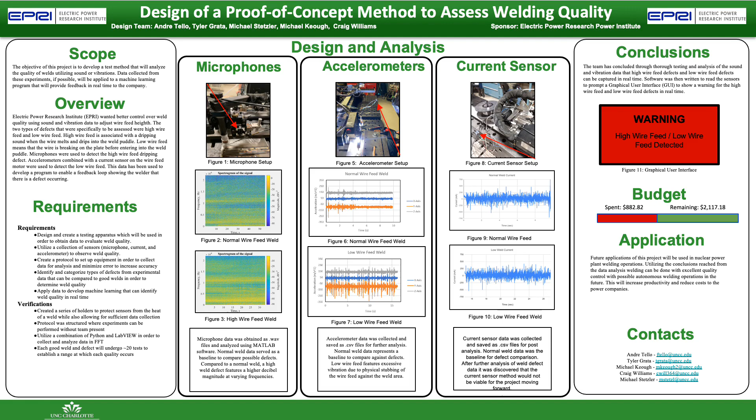Hello, we're the EPRI WELDS team, and our project for the Electric Power Research Institute is to design a proof of concept method to assess welding quality. The objective is to find a way to detect weld defects using sound or vibration, then use data to provide real-time feedback to the welder using a feedback loop.

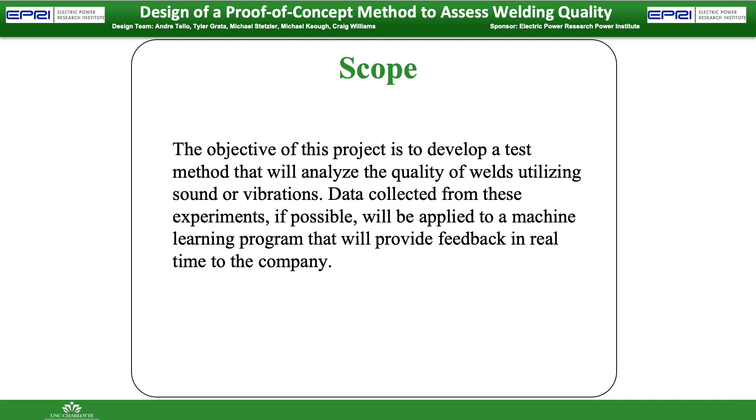EPRI wanted to use sound and vibration in order to get better weld quality. High wire feed and low wire feed defects were assessed in testing. Microphones are used to detect high wire feed defects, and accelerometers are used to detect low wire feed defects. Data from both sensors were used to develop a feedback loop to show when defects occur.

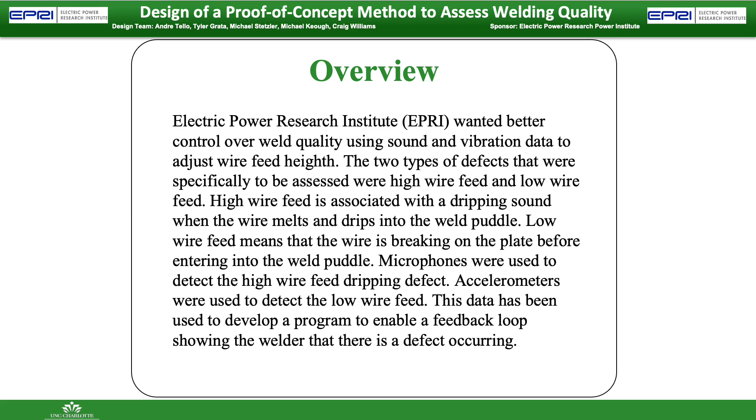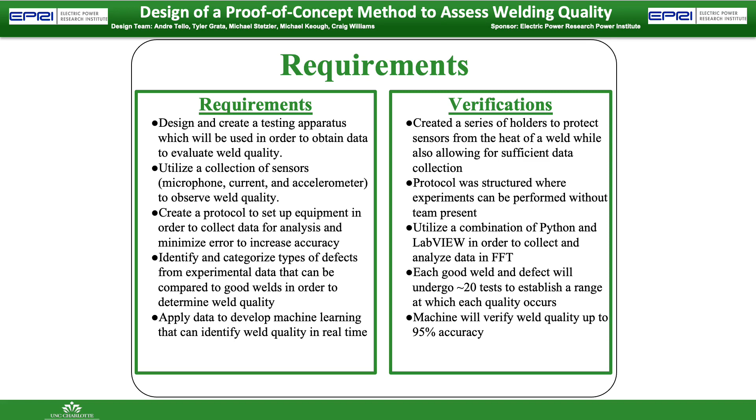Here are the requirements and verifications for the EPRI WELDS design project. One such requirement is to design and create a testing apparatus which will be used to obtain data to evaluate weld quality. One such verification is to utilize a combination of Python and LabVIEW in order to collect and analyze data in an FFT.

The microphone design consisted of a holder mounted to the weld head in order to record any significant sounds each type of weld may produce. This holder was initially 3D printed out of PETG plastic, and will be 3D printed out of aluminum as a final product.

Data collected from the microphone was recorded as a WAV file for the team to efficiently analyze every test run. Microphone data was analyzed using MATLAB software, which was able to plot the entirety of each WAV file as a spectrogram. For comparison, normal weld data served as a baseline to show discrepancies from any weld defect. Using microphones, the team successfully identified a weld defect during testing.

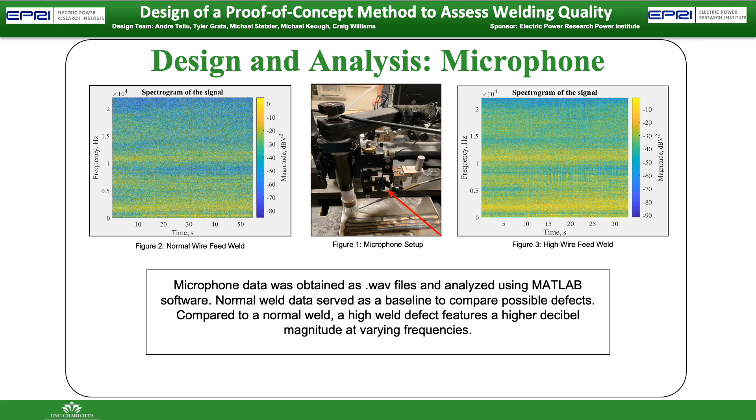The accelerometer design featured two accelerometers. One accelerometer was placed on the weld head to be used as a reference to the second, which was placed on the wire feed itself using a holder designed by the team. The holder was 3D printed with PETG plastic in order to allow free movement of the wire feed for weld quality detection.

The team collected data from both a normal weld and a low wire feed weld defect into CSV files for future analysis. Normal weld data was used as the baseline when comparing both sets of data. When viewing both sets of data, the team successfully concluded that the weld defect was identified using the accelerometer method of detection.

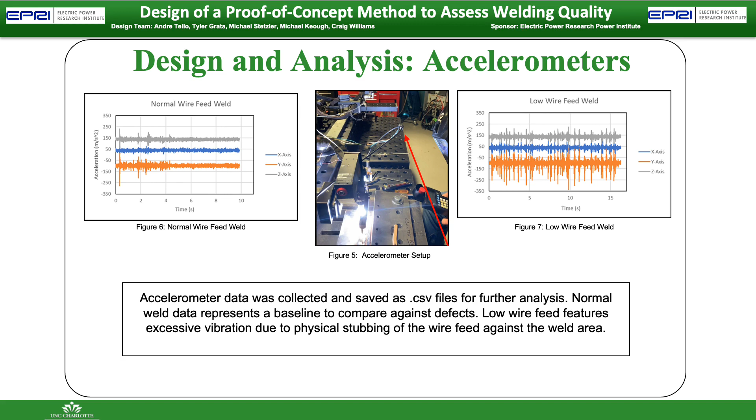The current sensor design mainly consisted of using a current sensor to monitor the current draw of the wire feed motor during welding, in hopes of detecting any patterns for each type of weld. The data collected from this method was stored as a CSV file and further analyzed to assess the sensor's effectiveness. The team was able to successfully view the behavior for both a normal and low wire feed weld, but no differences were able to be determined based on the motor's current draw. The team decided that the use of a current sensor would not be useful for the project moving forward.

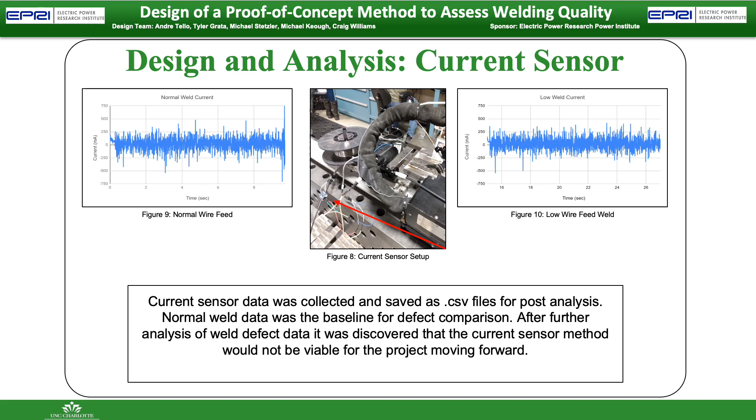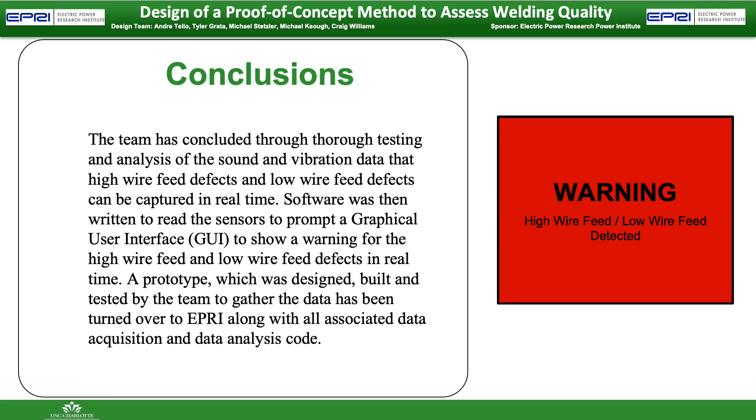The team has concluded that it is possible to detect high and low wire feed defects using sound and vibration equipment, and has created software to give a warning when the defect is occurring to the welder in real time. A prototype built by the team has been turned over to EPRI with all data and data analysis code. The team came in under budget, spending only $880 of their available $3,000 funding.

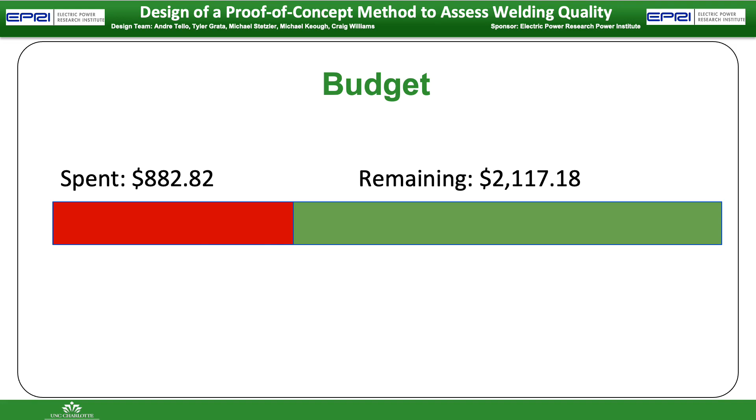The application of this project will be used for quality control purposes in nuclear power plants' welding operations.